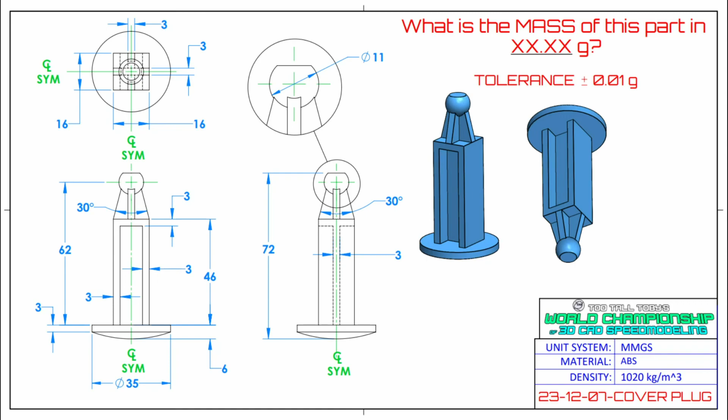So let's switch over to the diagram and take a look to see how we should approach this, and then jump into Alibre. So let's get started.

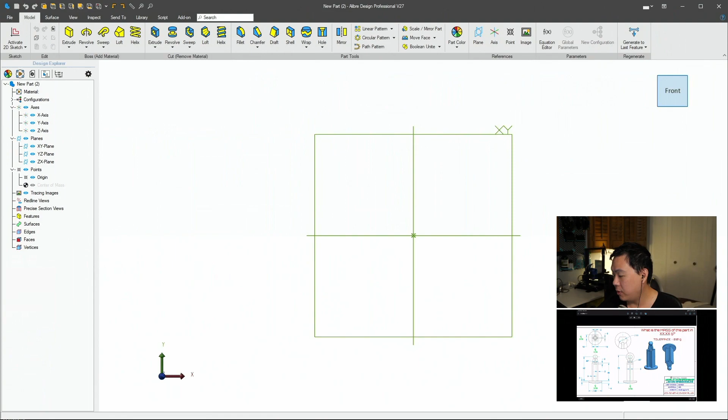Okay, so if we look at the drawing, basically the approach I took is as follows. What I'm going to do is first create this base, and from this base, from the side profile, I'm going to draw in the outline of this outer shell.

Let's just call it shell, this outer shell. I only need to draw in the outline because in order to get the inner dimensions, I'm going to use a thin extrude to do that.

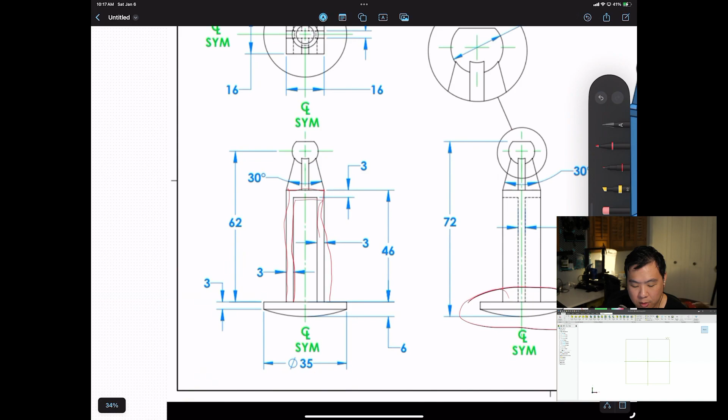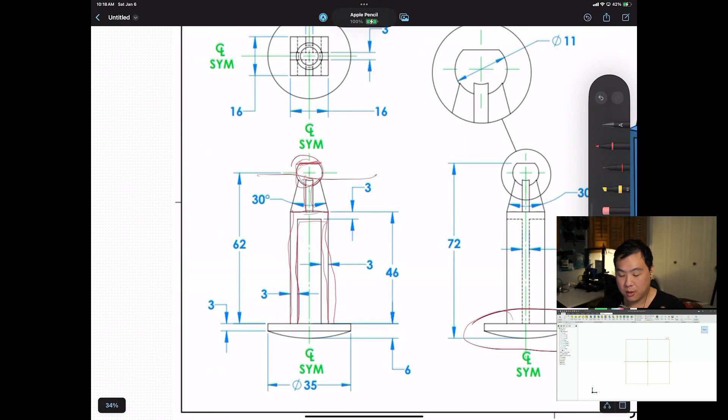Afterwards, I'm going to create this sphere. Then after creating the sphere, I'm going to create these angled material that extrudes into the sphere. Lastly, I'll make a cut along the top to get that flat cut in the sphere. And that'll be it. So with that in mind, let's jump into Alibre.

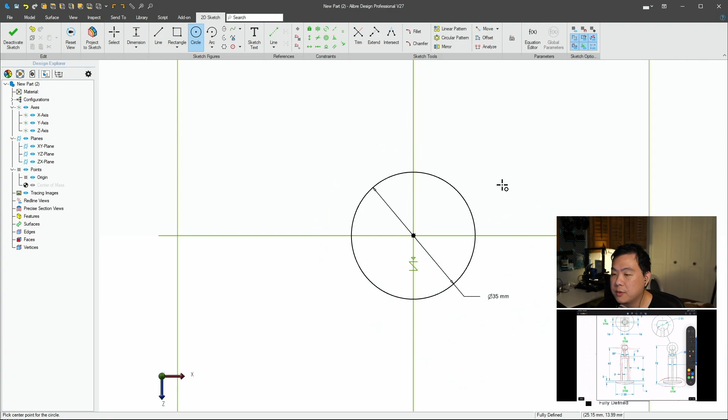So in order to make the base, I'm first going to make a sketch on the ZX plane, looking top down. From the ZX plane, I'm going to draw in a circle. It says from the drawing that the diameter is 35, so I'm going to put that in. Now I'm going to enter extrude, and it says the height of that base is 3 millimeters. Click OK.

Now from the side profile, I'm going to create a sketch on the XY plane. What I'm going to do is draw half of it and then do a revolve.

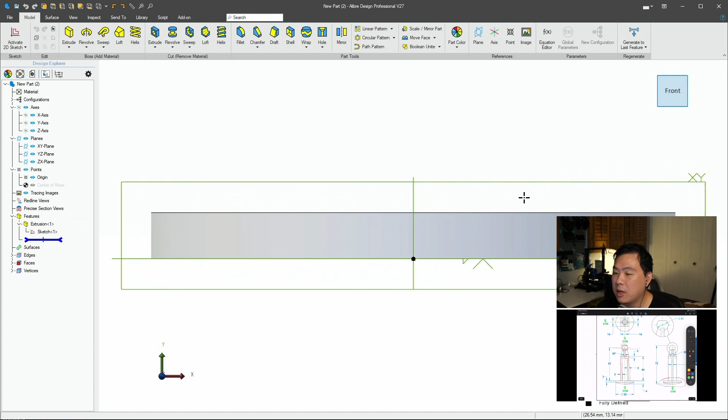So I'm going to activate a sketch on the XY plane. I'm going to project in the base that we created for reference. And then before we get started with anything, I'm going to draw in a line that I'm going to use as a reference, so convert that to a reference figure.

Next, I'm going to dimension in the height, or the offset, of this line from the top of this base as 6 millimeters. Then I'm going to draw, using the line tool, a line that extends to half of this base. I'm going to draw another line that touches this reference line.

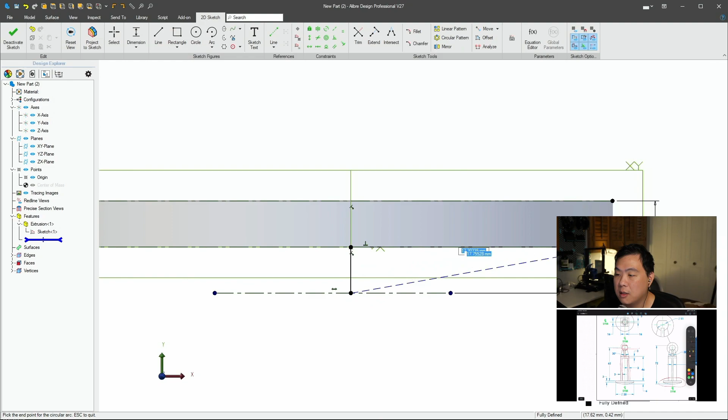And then now I'm going to draw in an arc. Notice how the arc's position and magnitude is undefined. In order to define it, I'm just going to add a tangent constraint from this arc to this reference line. And now everything is fully defined.

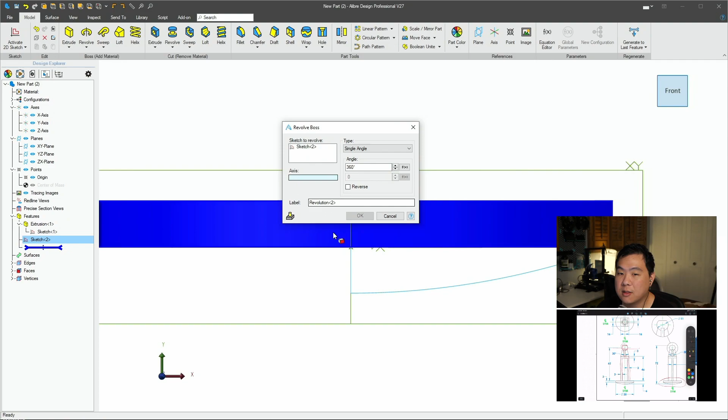I'm going to deactivate the sketch. I'm going to use the revolve tool, use the sketch that we just created, and the axis would be our y-axis. Then we click OK, and now we've got that curved bottom done.

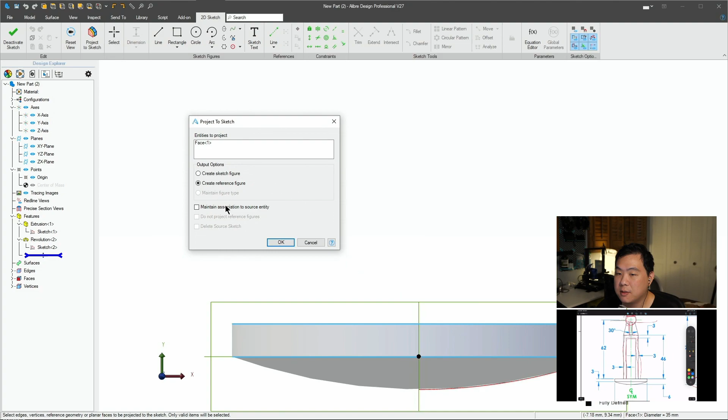Next thing we're going to do is create that shelf, like I mentioned. In order to do that, I'm going to create another sketch on the XY plane, and again project in the base for reference, maintain association. And then here, I'm going to draw in a rectangle.

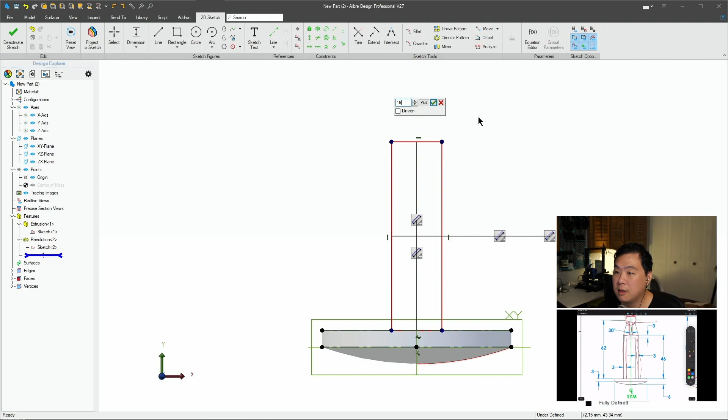And like I said before, I'm just going to define the outside of the shelf. So to do that, let's see here. We can define the width of the shelf as 16. We want to add that symmetry along the y-axis, so symmetry constraint, select the y-axis, and then select these two edges.

And then we want to define this height from the bottom of the base. So the height from the bottom of the base, as from the drawing, it says it's 46, and that's fully defined.

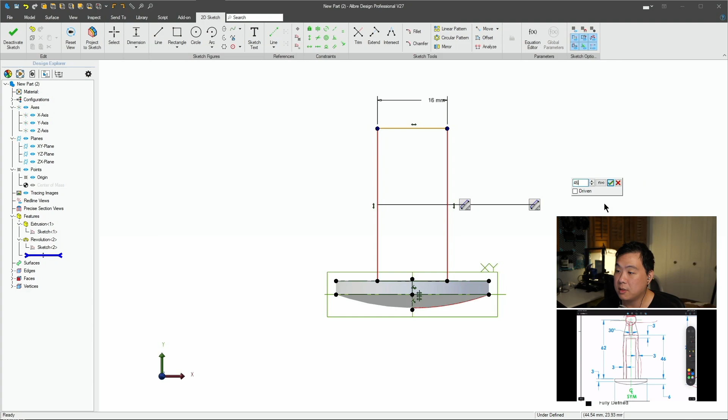Now I don't actually need this edge on the bottom. I'm not going to be extruding that, so I'm going to select this edge and convert it to a reference figure, and deactivate my sketch. I can ignore the warning for this. Now I'm going to enter the extrude option.

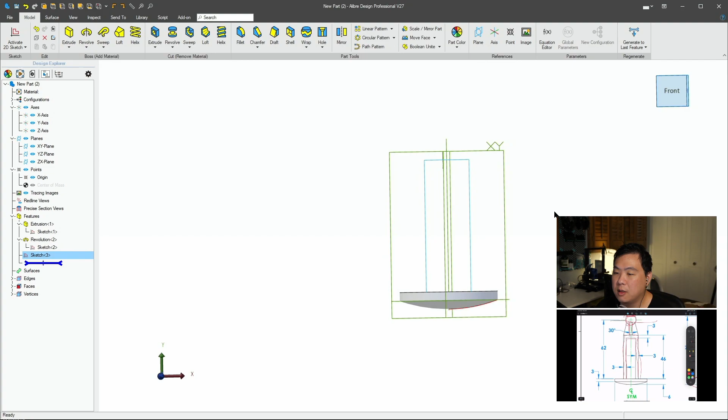I'm going to select thin extrude, and we do want it all centered, so we're going to select the type to midplane, and the depth, we're going to set that to 16. And then with the thin extrude, the thing to look out for is it gives you these two options for wall thickness, side 1 and side 2. Basically, that defines whether we want the extrude to go inward or outward or both.

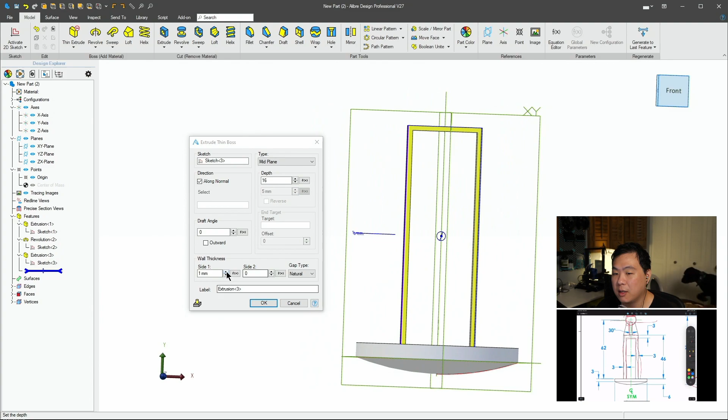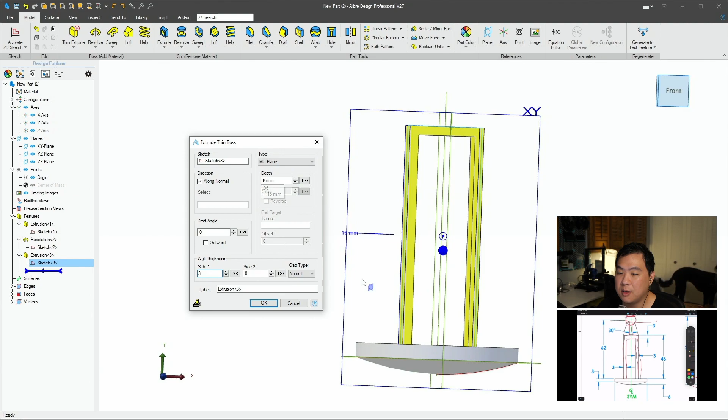So let's see, if we increase side 1, it looks like it's going inwards, which is what we actually want because we defined the profile of the outside outline of the shelf. So side 2 would be to make it thick going outwards, which we don't want. So we can set side 2 to 0, side 1 to 3 millimeters. Again, we have midplane depth is 16. We can click OK, and that's part of the figure.

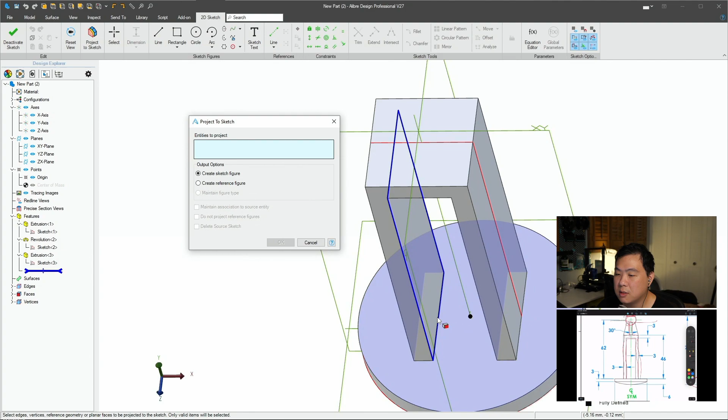Now I'm going to draw another rectangle on top of this base that will then extrude upwards to get our middle piece of this column. So let's create a sketch on this face. I'm going to rotate around so I can project these two edges. Select this edge and this edge just as reference figures. So create reference figure, maintain association. I'm going to then reset my view.

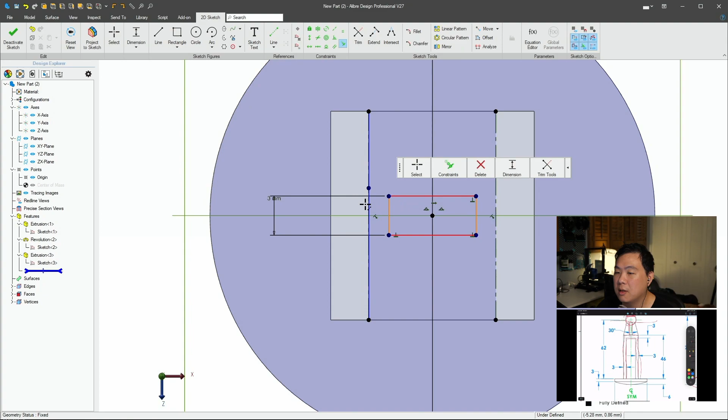Now I'm going to draw a center rectangle that touches these lines. I'm going to then add a dimension of this to be 3. And then I guess I just need to make one of them horizontal. Would that fully define it? What else do I need to do? Oh yeah, okay. Using the coincident constraint, select one of these points. This point needs to touch this reference line that I projected. And now it's fully defined.

So I can deactivate the sketch now. Use the extrude command. I can use to geometry and then select the top of this face. And that gives us our middle column.

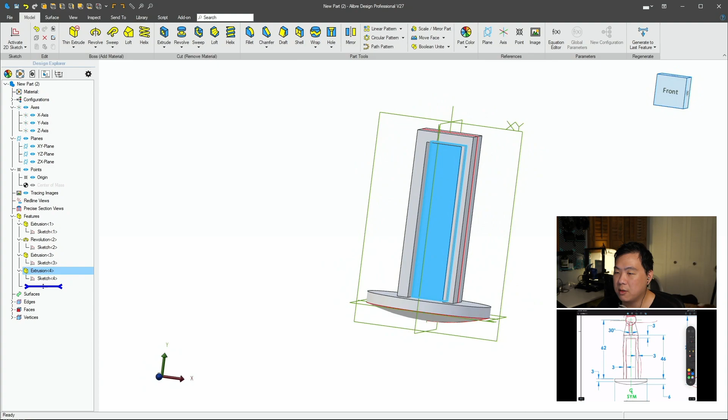Next thing we need to do is create that sphere. Looking at the drawing, we can see that the center of the sphere is 62 millimeters from the top of this face. So in order to do that, I'm going to create a plane. Select the face, and then I want to offset that distance to be 62 millimeters and click OK.

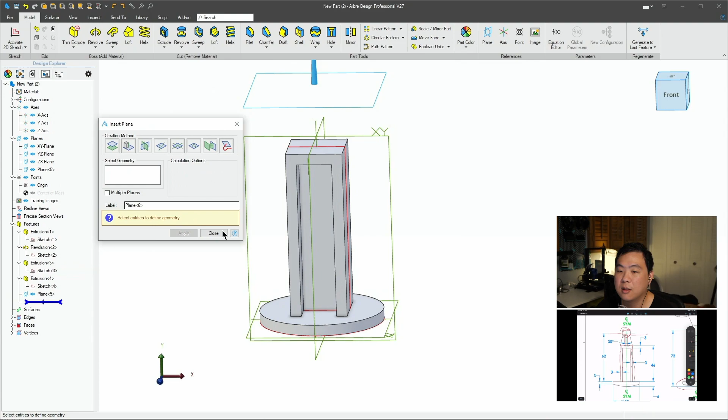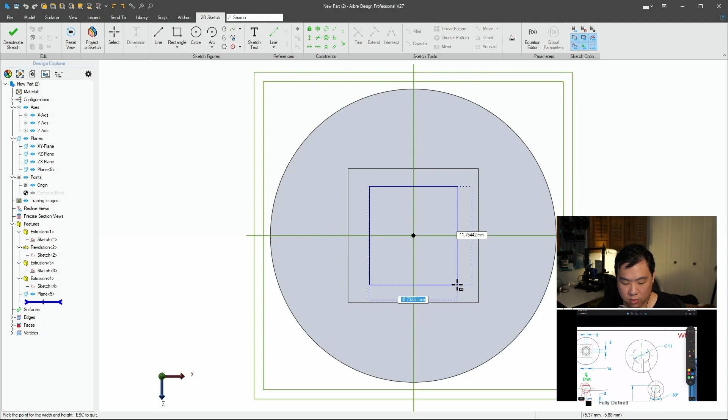Now I can create a sketch on this plane, and there's no sphere tool in Alibre, but what we can do is create a cube and then fillet all of the faces in order to create that sphere. And that's what I'm going to do. So on top of this plane, I'm going to use the center rectangle tool. I'm going to define the dimensions of this rectangle as the diameter, which from the drawing says it's 11. So it's going to be 11 millimeters wide and 11 millimeters tall. I'll click OK. I just need to make one of these edges horizontal to be fully constrained.

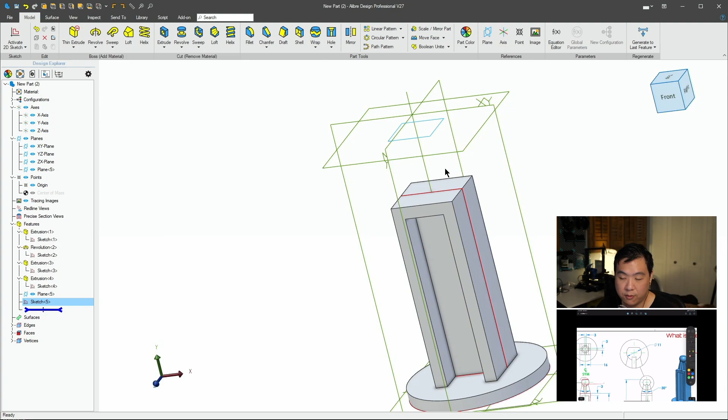I can deactivate the sketch now. And since the 62 millimeter offset is to the center of the sphere, I need to also do a regular extrude of 11 millimeters, but select the type to midplane, so it remains centered. I'll click OK.

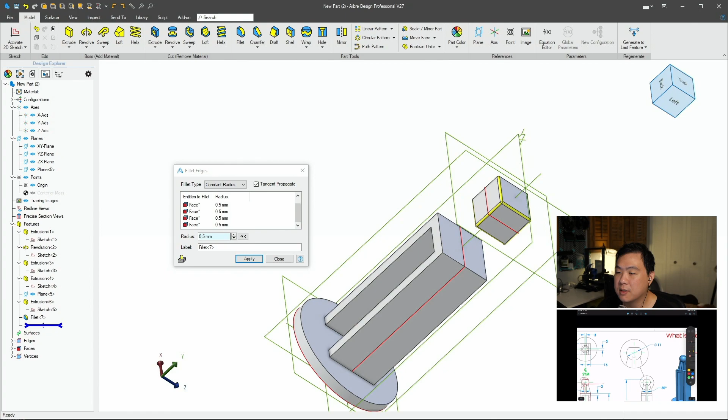Now I need to use the fillet command and basically select all of the faces. 3, 4, all six faces. And then for the radius, since the diameter is 11, I'm going to use 11/2 as the radius. So I'm going to click apply, and now I have that sphere.

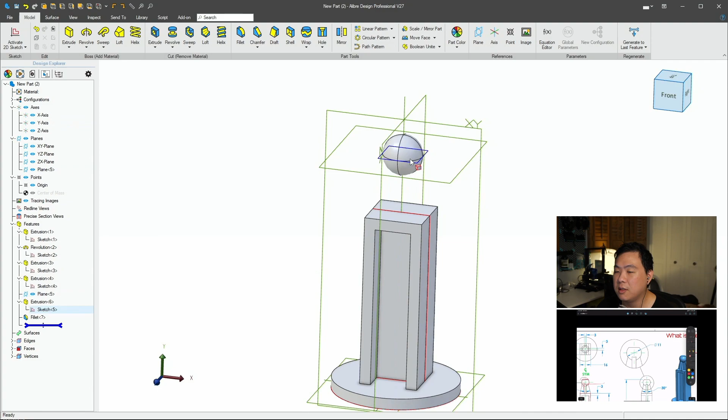Next thing I'm going to do is create those extrusions upwards into the sphere. In order to do that, I'm going to create a sketch on the XY plane again. And here I'm going to project in this pillar as a reference, maintain association.

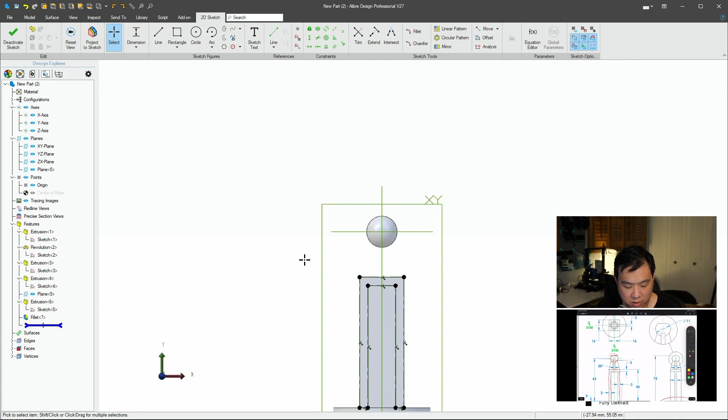And here, in the diagram, it gives you a dimension of 30 degrees between these two edges from the side profile. But you can really think of it as a triangle with the top of it cut off, right? And that's exactly what we're going to do. We're going to actually draw in a triangle as a reference.

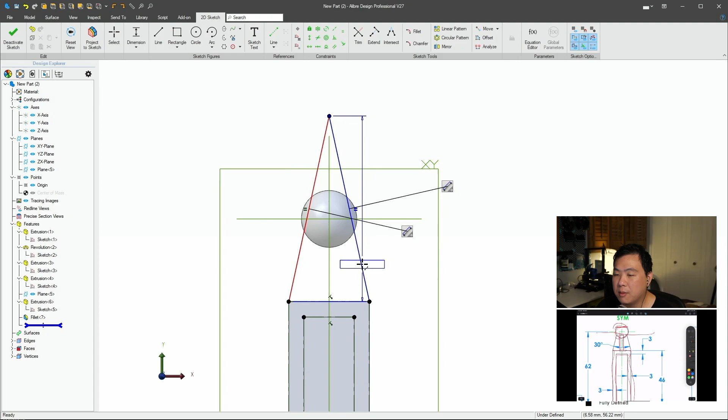So here's a triangle that I just drew in using the line tool. I'm dimensioning that 30 degrees. And then since we don't actually want this top part, I'm just going to convert these two edges to references. Now here we just need to draw a line across that cuts anywhere within the sphere. I'm just going to draw a line now. Let's just make it parallel.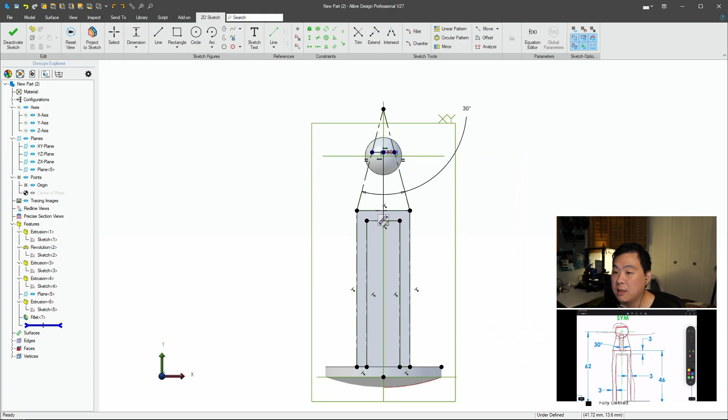Oh, let's see. So the sketch is under defined because we haven't specified the height. I'm just going to use the same height as towards the center of the sphere. So I'm going to use the dimension tool, click on this point, click on the base, and then add in 62 as the height. And now it's under defined because you can see that this point is not touching this line. So I'm just going to add that coincident constraint, click on this point, click on this reference line. Now this line is defined.

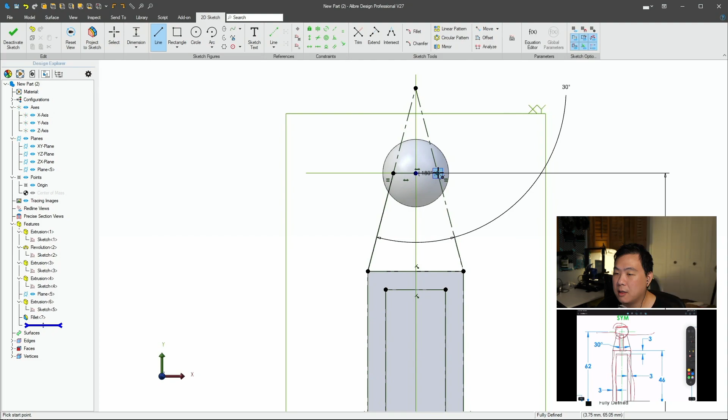Now we have to close off the figure before we can extrude. So I'm going to use the line tool to add this line and then add this line. And now we're done. I can deactivate the sketch and I'm going to use the extrude tool again. I'm going to select 3 millimeters and the type to midplane. And that's 1/2 of this cross extrude piece done.

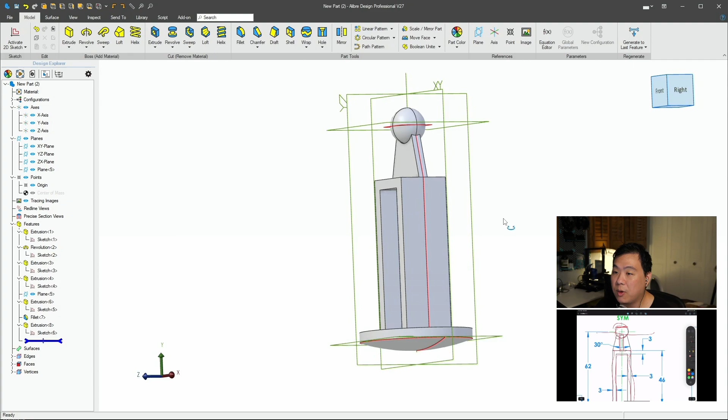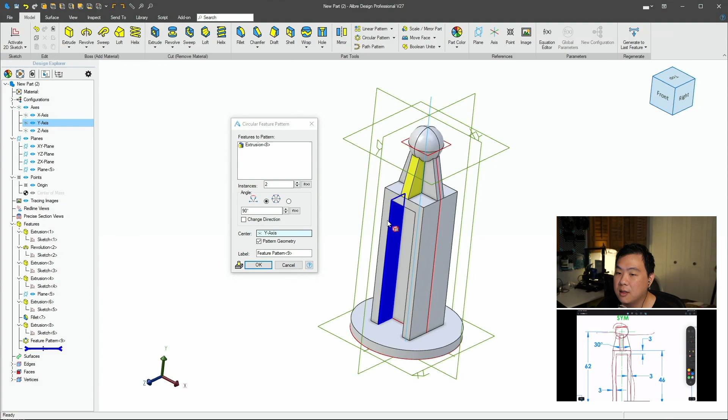Now I can repeat this on the YZ plane and do the same thing again, or, well, I don't know if it's better, but another approach is to use the circular pattern. I'm just going to use the extrusion that we just created. I'm going to have 2 instances of it, but angled 90 degrees from each other. So it rotates by 90 degrees. And the center that it rotates on would be this Y-axis. And then click OK.

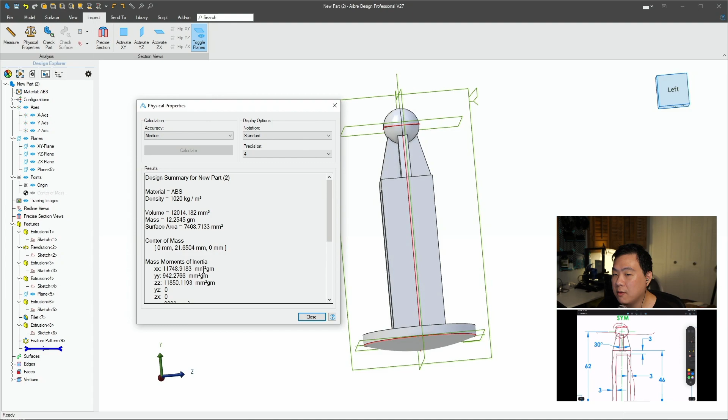And that's our part. So in order to check our work, go to Materials, select from Material Library. I'm going to select the ABS material, and then go to Inspect, Physical Properties, Calculate. And the solution we get is 12.2545. Oh, sorry, we're not even done yet. I forgot to do that cut from the top. That's why it's a little bit heavier.

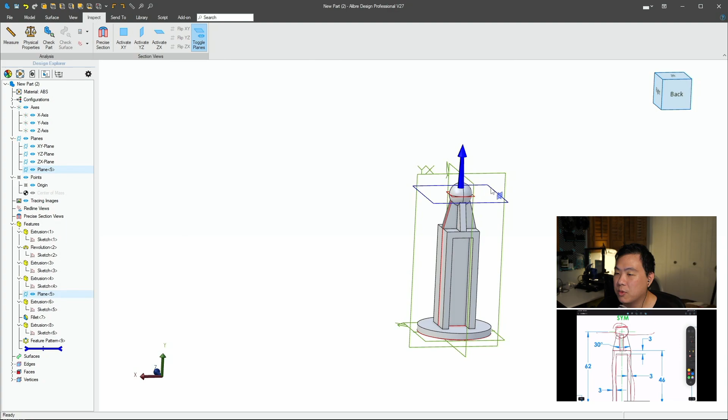Okay. In order to do that cut along the top, I need to basically create a plane that runs across where I want to cut and then do an extrude cut from there. In order to do that, I am going to go back to Model, go to Plane, insert a plane along this front relative to this face.

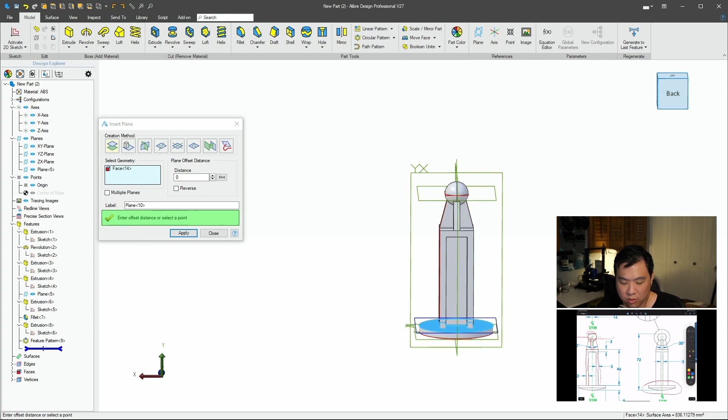Now, in the drawing, it actually says that the height of the cut is 72, but that's relative to the bottom. But we do know that the height from the face to the bottom is 6 millimeters. So I'm just going to subtract that from the 72. So the distance offset I want from this face is 72 minus the 6 millimeters, and that gives me the correct height. I'm going to click Close.

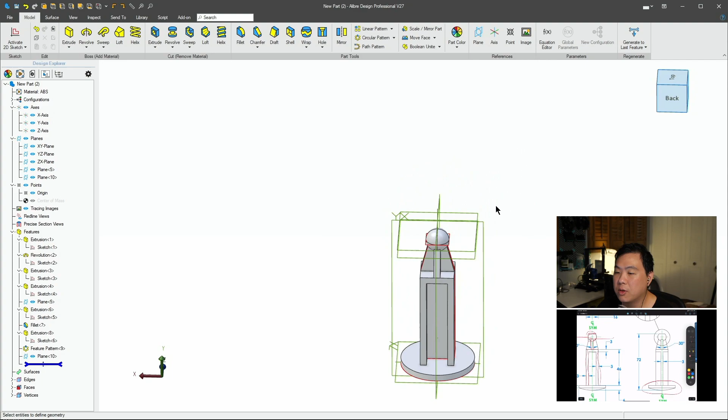Now I'm going to create a sketch on this new plane, and essentially all I need to do is project in the square that I used to create the cube. So I believe that would be sketch 5. I do want to create a sketch figure and maintain association, and click OK. And then I can deactivate the sketch.

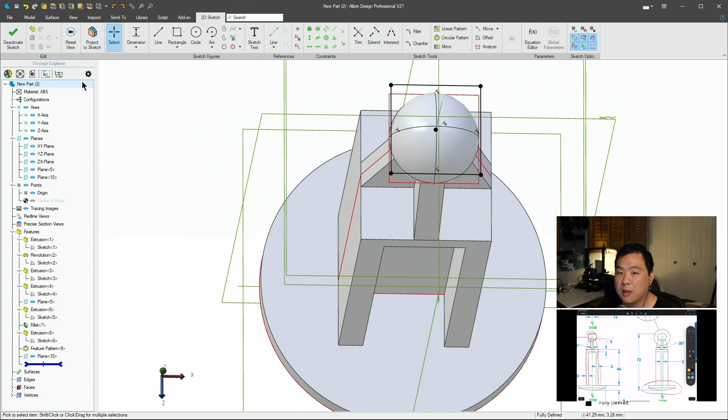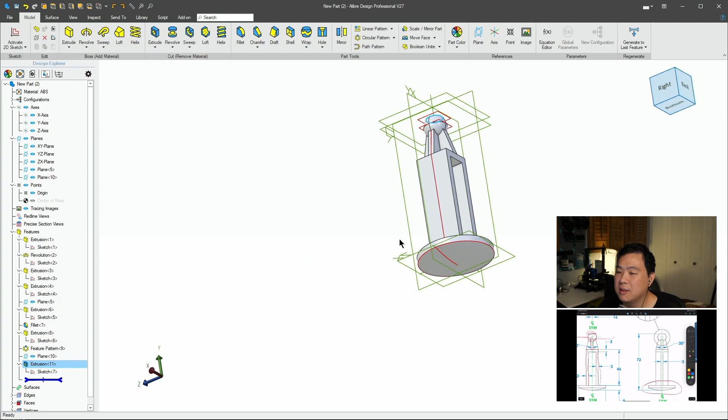Now I can do an extrude cut, and it's going the wrong way, so I'm going to click reverse. And the depth could be really anything. I'm just going to set it as 11, that's the diameter of the sphere. And then click OK. And now I think our part is done. We've already selected material. Let's go back to Inspect, Physical Properties, Calculate.

The solution we get is 12.2184 grams, and if we go to the solution, the answer revealed is 12.22 grams, and we get 12.2184, which is within the specified tolerance. And yeah, that is our part.